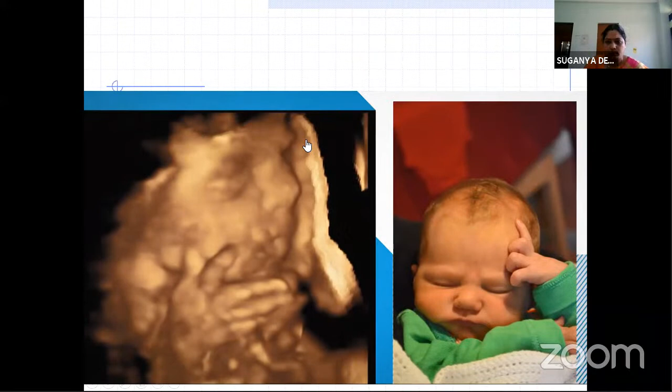Medical imaging really makes visible what otherwise would remain hidden, and it has already become a key technology in medicine. With a modern 3D ultrasound, for example, I was able to see my daughter six weeks before she was born, and I got very well prepared for her mood. But the way doctors look at these images is quite different from how you and I would look at them. Doctors get very long and hard training to become incredibly skilled in seeing critical patterns in these images.

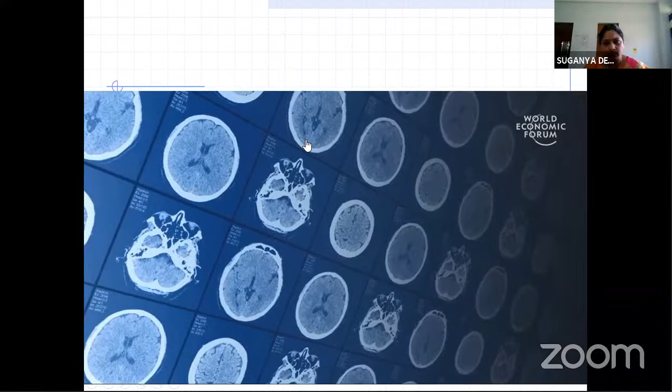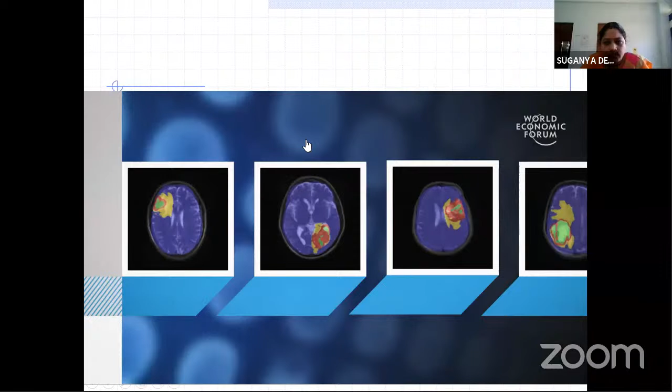To tell the difference between healthy development and disease, and to see whether a treatment works or not. But some diseases are so complex that looking at a single image is not enough to fully understand what's going on, and this is where it gets really tricky. A brain injury, for instance, might show in one image, but to really understand, to get the full picture of the disease, you need to take multiple images, multiple scans with different techniques, so doctors can make a decision. But reading those complex images is not only very time-consuming, but it really pushes human abilities to the limit. Patterns of disease can often be so complex and subtle that it's really difficult to get it from the images. Brain tumors, for example, can appear almost anywhere in the brain with very different sizes and structures and shapes. It's very difficult to understand exactly what's going on.

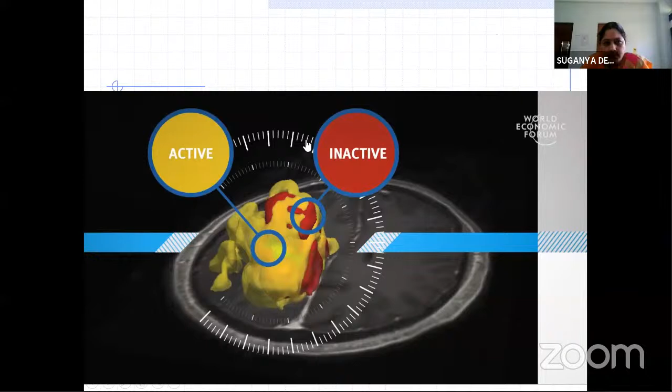Often it's not enough to make a tumor visible, but we need to measure what's going on - for instance, tumor size. It's very important to make a decision whether you do surgery or other options. But tumor size alone is not enough. We need to understand what's happening inside the tumor - for instance, do active parts become inactive when you give a particular drug? This is really important information that doctors need to make the right decision at the right time, and without that information, there is a real risk that critical patterns of disease go undetected.

How do we help doctors make the best use of these images? Putting it all together is really challenging, but this is the challenge that we are taking on in my lab at Imperial College. We ask, what if we could train a machine to help us read those images, to detect patterns that humans find difficult to see? Can we even go beyond this? Often we don't know what we are looking for in those images - what are the patterns that describe a disease? Can we build an intelligent machine that can help us find those patterns?

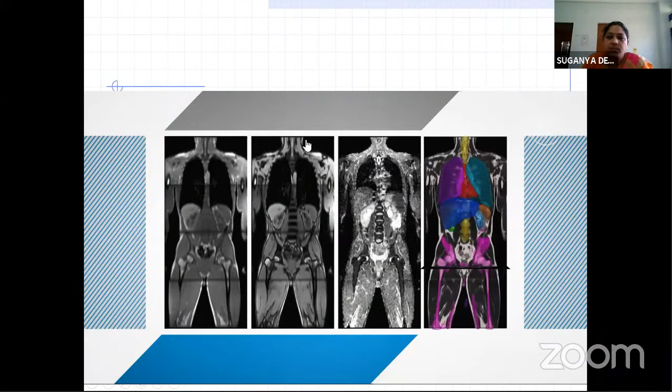Just a couple of months ago, we all saw a machine beat yet another human world champion in yet another board game. But what was really exciting about this achievement was that the machine's skills were not acquired by programming, but by learning. The Go-playing machine learned by playing millions of games to detect patterns of great gameplay, and our machine learns by viewing thousands of medical scans. One of our first big achievements was being able to train a machine to recognize all major organs with an accuracy of a human expert. That's really important, because now the machine understands what is visible in the image. So we took this further - we then trained a machine that could search through multiple...

Here I am stopping. So, as already it is known, actually I have a question for the participants - what actually you have inferred from this video?

A very good research oriented aspect has been discussed here. I don't know how many of you have grasped this. First, you have to think in a retrospective way. Usually for medical image analysis, say cancer detection like brain tumor detection, the traditional approach is we take the image of a brain tumor patient and try to locate where the tumor is. This is how it has been carried out till now.

So what contribution can we make? Nowadays robots are doing surgery, values are fed to the robot so it can perform the surgery. As soon as robotics comes into play, the Internet of Things is also there. As humans, even doctors have some difficulty finding critical patterns, but if a machine is well trained, those critical patterns can also be found with the help of machines.

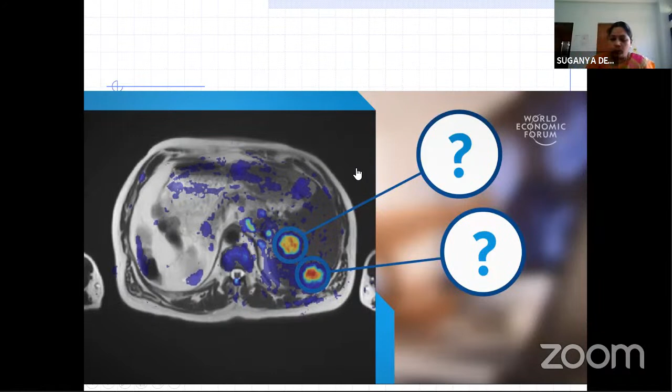This is IoT in healthcare, normally in healthcare diagnosis. In summary of IoT in healthcare, the key points are: foreseeing patient problems before they even experience symptoms. This is related to custom vaccination for cancer, I don't know how many of you have come across this term, you can Google it. This approach of foreseeing patient problems before symptoms appear could avert adverse events. So how can we achieve this predictive capability?

Yes, with the help of IoT data we can predict future diseases. This is an entirely different thing using data collected from genomics, that is computational biology. A high performance analytics environment is designed to examine complex questions and produce models. So this is one thing we can do in healthcare: predictive analysis of future diseases, and we can give contributions with the help of IoT for that.

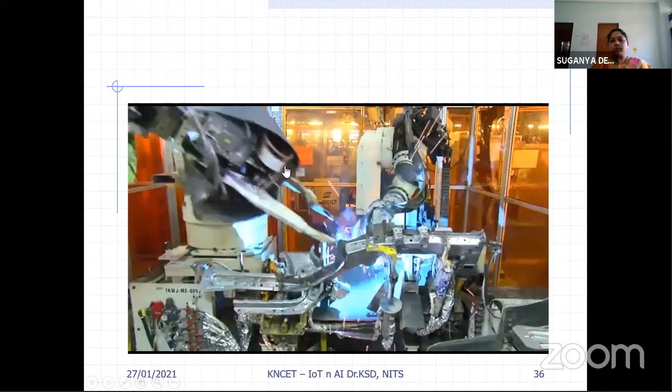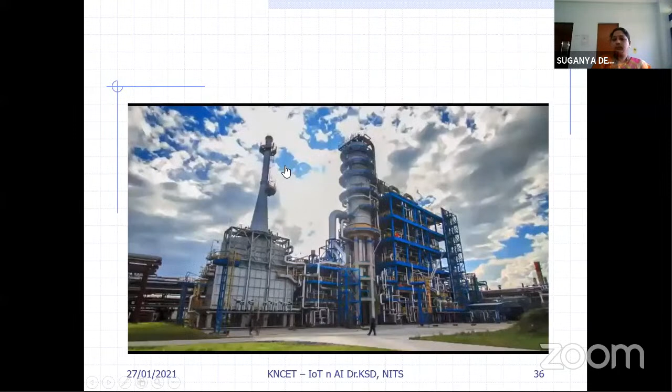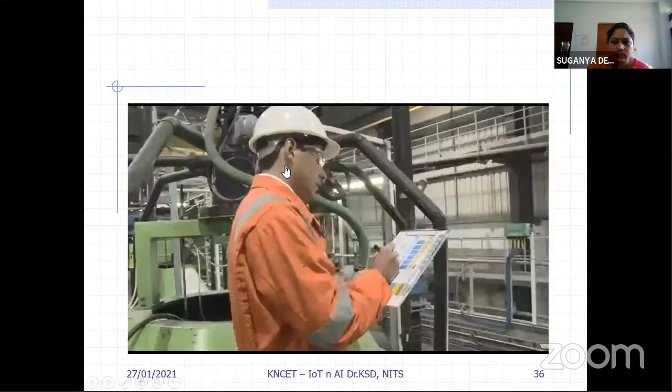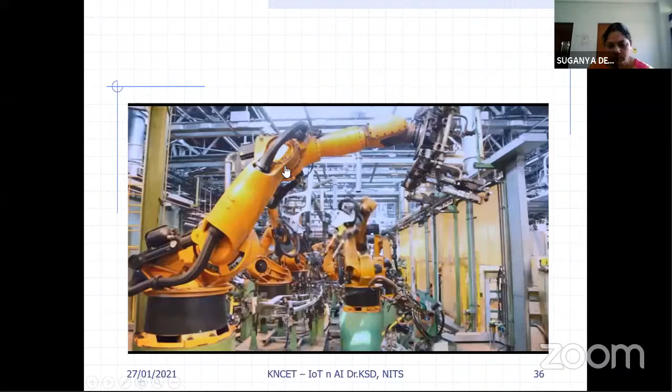How analytics fit into the industrial Internet of Things. I'm Dave Froning from SAS, and I've loved manufacturing for more than 20 years. Industrial companies wrestle with really difficult problems, from complex supply chains to motion applications to labor constraints and equipment breakdowns every single day. For manufacturers, solving problems is nothing new. However, with IoT, competitive organizations are finding new cost savings and revenue opportunities. Instead of their flood of data becoming an overwhelming challenge, with analytics it becomes an asset.

Analytics help operations sense what's important and understand where value can be generated. Here a particular part has been taken, and its hours of operation have been retrieved. Based on this, we can know the capacity of this machine, how much time it has worked and how much more time it can work, so that we can determine the load we can give it. All this analysis can be made.

Act immediately to capture that value. For example, the audit schedule they have made is 1,000 units. Once it reaches 1,000, there should be an alarm that the machine needs a break. Even though it is a machine, it should need a break. So instead of manually checking those things, we can have sensors to count how much it is working, how many hours, or how many oscillations, depending upon the machine we are using.

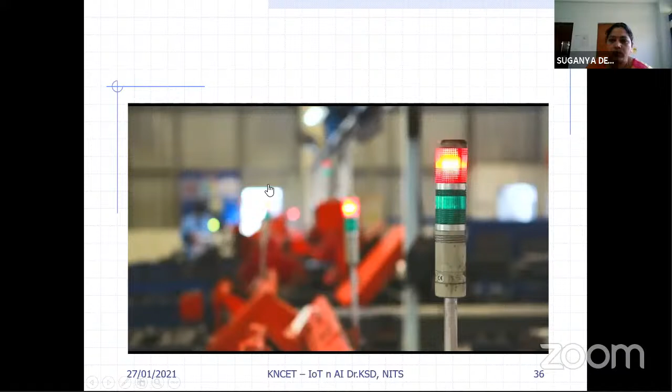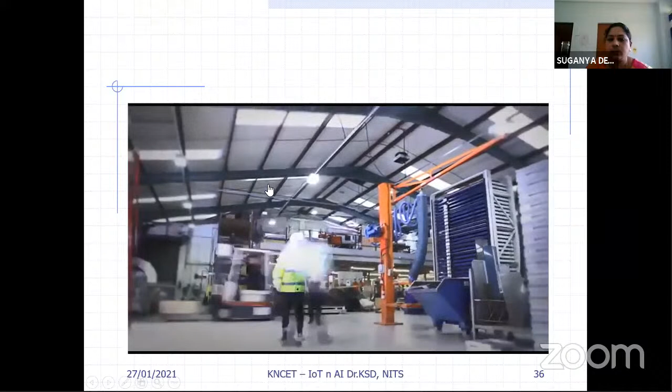Specifically, manufacturers are using analytics to predict impending equipment failures, improve quality and market responsiveness by coordinating extended and complex supply chains, and better engage with their customers to develop. I'm stopping this video here because otherwise I will be running out of time.

The Internet of Things is a transformative movement in technology, particularly in manufacturing. In manufacturing, it applies the concept of connected devices to power smart manufacturing. Everything becomes smart with the help of the IoT. Now, to get the value out of IoT, obviously you need the AI. So in manufacturing, it becomes smart manufacturing. Healthcare becomes smart healthcare. Agriculture becomes smart agriculture with the help of the IoT. Wherever smart comes, there the IoT plays a role.

This is the short summary of IoT in manufacturing. In fact, the industrial internet, which combines the physical machinery, networks, sensors, and software that we have seen in the video itself, the physical machinery networked with the sensors and software, has extensive use and promise in manufacturing, including production optimization, product development, and aftermarket servicing. Okay, this is for manufacturing.